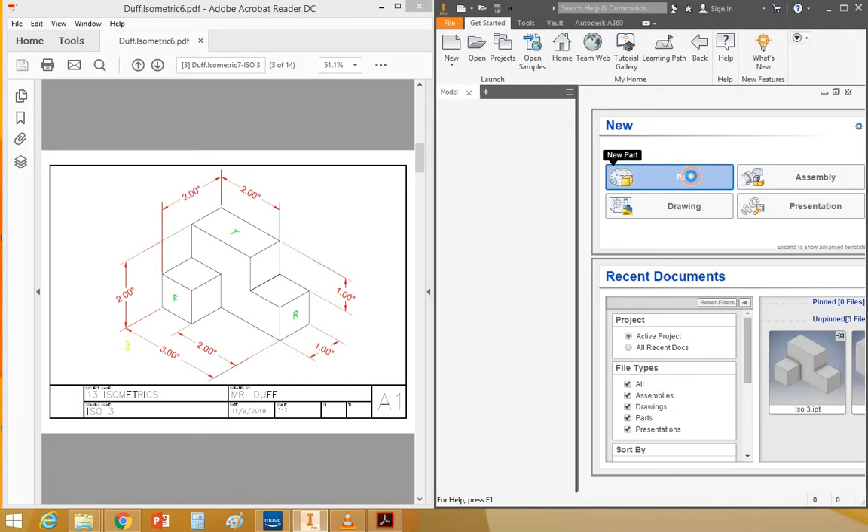So if I come over here and I go to part, I'm going to start a new part, and what I like to do right off the beginning is create a new sketch, put it on here, go to finish sketch, and then hit save. I'm going to go to File, Save As, and name it ISO 3. I already have an ISO 3, but I'm just going to save over it. So you would have to name it ISO 3.

I'm going to kick back down to the size it was, split our screen with it. And now I'm going to start to draw this object. I'm going to go back in, edit my sketch, and I'm going to draw.

So let's go line. Oh, we missed our mark. Line, we'll go up 2, and we'll go over 2. So if you notice, I'm drawing this back section. I'm ignoring the front section, and you'll see more about that in a second. I'm also going to shrink that down a little bit. Oh, looks like that's as thin as it'll get.

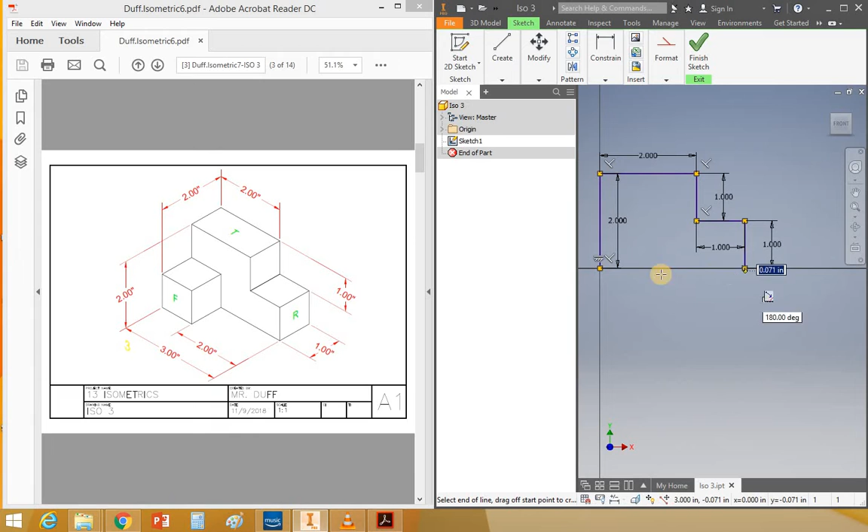All right, so we'll go down here, 1, out, 1, down, 1, and then close. Then we'll go to Finish 2D Sketch.

And I'll hold my mouse ball down so I can pan it where I want to go. If you didn't notice that yet, if you hold your mouse ball down, it brings the little hand up, and that allows you to move things around. So grab my little mouse ball.

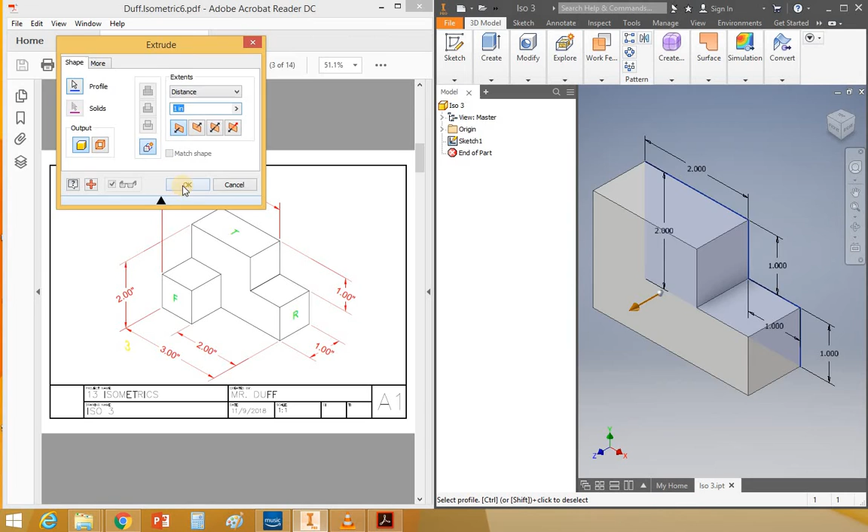So now we're going to go and we're going to extrude just like we did in the last video. Click here, click extrude. My offset distance is already set correctly to 1 inch. You see there's the 1 inch right there. So I'll say okay. Now I have this whole back half.

So now I have to put another sketch plane down. So if I go up here and I hit sketch, start 2D sketch, rather than clicking up here or anywhere else, I'm going to click right on the face of the object I want to put it on. So we click there. Then I'm going to go to create and line.

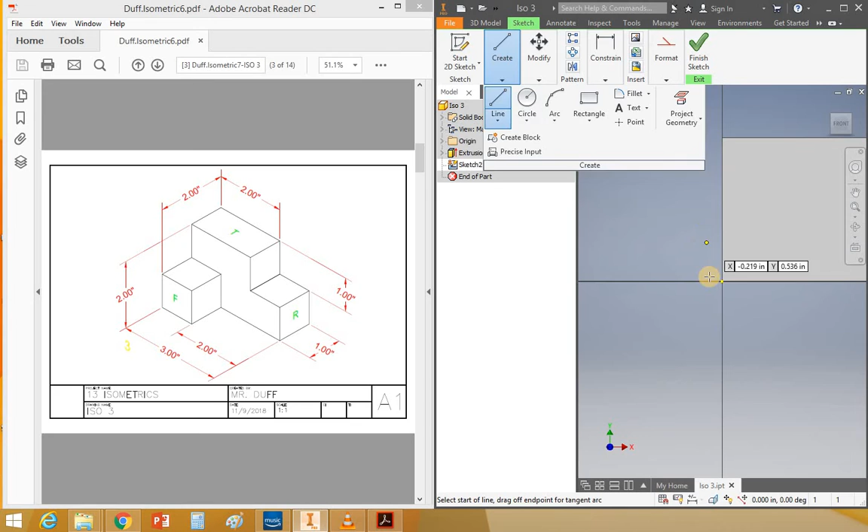I'm going to come up 1, go over 1, down 1, close, finish 2D sketch, extrude, say OK. And now I have my object, right?

So that's the best way you want to do it for 2 bits. And if you look also, now we have extrusion 1 and extrusion 2. Inside of extrusion 1 is sketch 1.

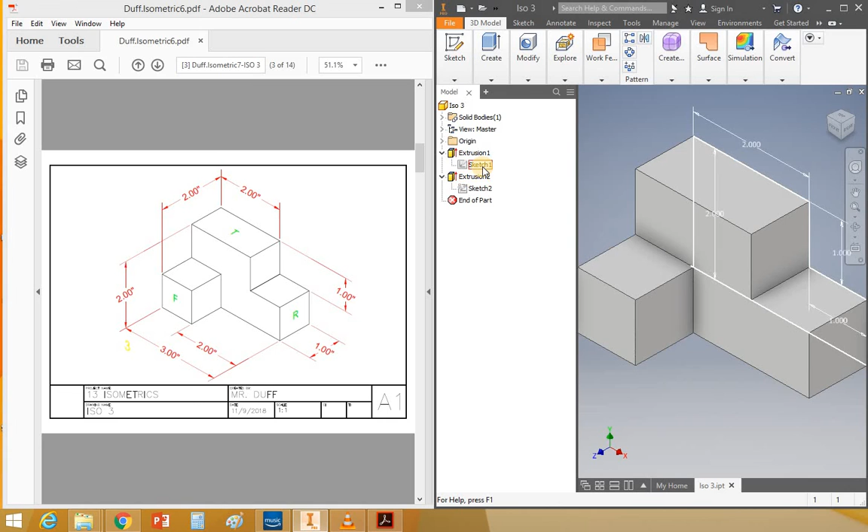So if I had to make an edit to just one of these 2 sketches and I didn't know which was which, if I come up here and hold my mouse over it, you'll see if I hold my mouse over extrusion 1, it highlights extrusion 1. This highlights extrusion 2. If I hit the mouse, you'll see it'll show me what sketch 2 looks like. If I hold my mouse over sketch 1, you'll see it shows me what sketch 1 looks like.

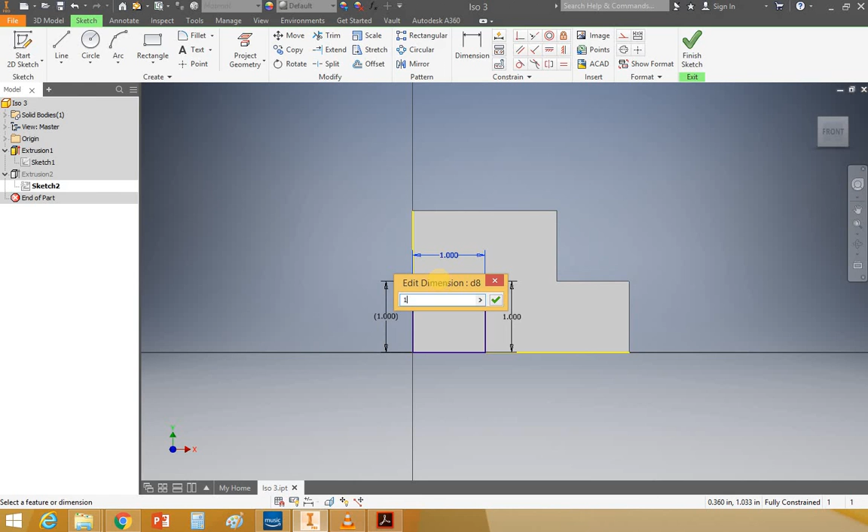So if I needed to make an edit to something, I could go back in here, go to edit sketch, change this to 1.5. Whoops, I think I just... Oh, I hit finish sketch somehow. Okay, change this to 1.5, and it would change. If I go finish sketch, it'll automatically update my extrusion.

Now, that's not what I want, so I'm going to go back. All right, Control-Z a couple of times, finish sketch, and now we're good. But so that's how we're going to put 2 different work planes on. If you have any questions, come up and ask, but otherwise, good luck.